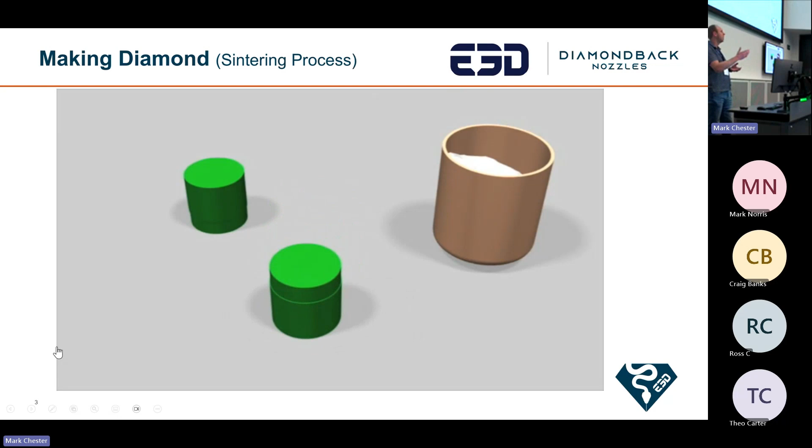So we take that powder, put it into a refractory metal can, a little container, put some tungsten carbide. We needed some sort of metal in there to act as a catalyst. We oftentimes use tungsten carbide with cobalt, so cemented tungsten carbide. Put it into this assembly that you just see here on the screen. That outer cube acts as a gasket.

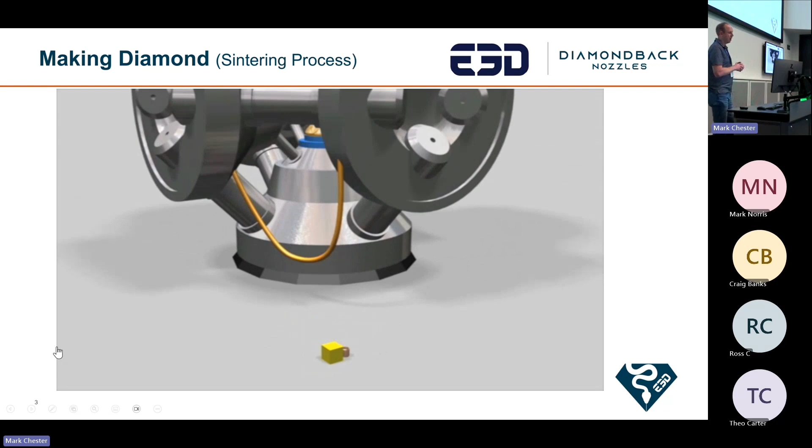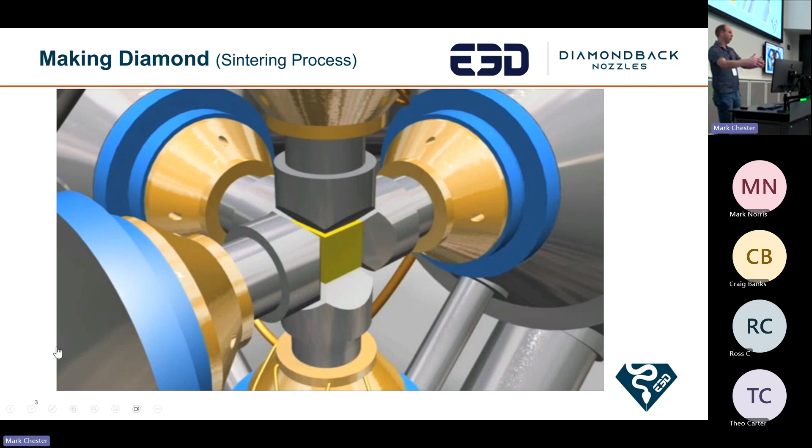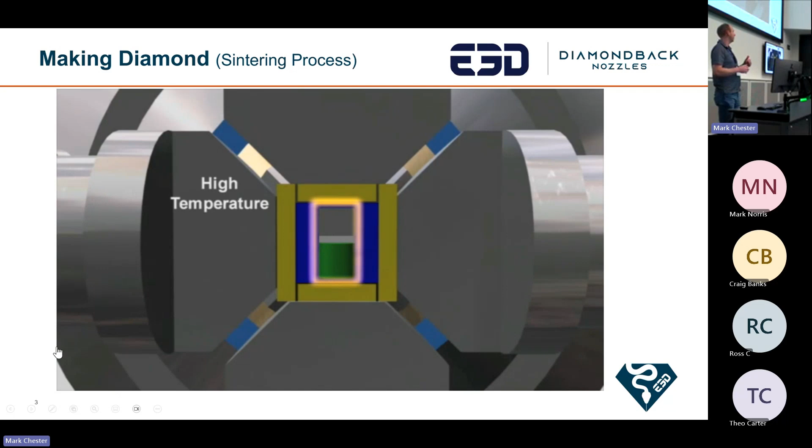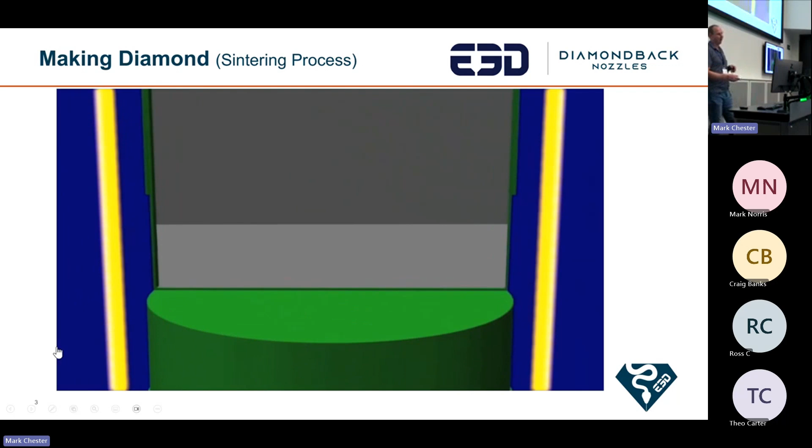So you've got internal pressures inside this press, about 9 meters tall, so you have atmospheric pressure and internal pressures that are over 1,000,000 psi. And so that gasketing material has to contain that energy, right? So not only are we adding pressure, we add high temperature to this, a graphite heater reaching over 1,400 degrees Celsius. So with those two conditions, and with the presence of that cobalt metal, that metal will liquefy, sweep into the diamond here, and that will be part of the animation in just a moment, which gets us into a condition where the diamonds actually grow together.

So you get diamond to diamond bonding. There's a little bit of confusion - some people think we take this diamond powder and put it in a matrix or a glue, if you will. But rather, the diamonds are growing together as one solid structure. So it's really where it stands out, where it gains its extreme material properties, abrasion resistance, and the thermal properties that we often have. As I mentioned during that animation, we reach over 1,000,000 psi conditions inside that press and over 1,400 degrees Celsius.

When we come out of that press, or during that cycle of that press, those conditions - it's like, what does 1,000,000 psi mean, right? For me, that's hard to even understand, what the number really means. So to bring it into reality, we like to compare it to taking the Eiffel Tower and putting it on a surface area smaller than your build plate on your printer. The pressure that build plate would experience, and that still doesn't even bring it into reality, but maybe a little step closer to help us understand what the extreme conditions are inside this process.

It's probably a little more background on the company behind Diamondback. So Diamondback is the brand, and the company backing it is US Synthetic. It's a company based out of the US in the state of Utah, in the western states of the United States. We have about 850 employees on site, a lot of engineers, a lot of patents being produced around diamond. We pride ourselves in being one of the leaders in diamond solutions in many industries, and additive manufacturing, 3D printing being one of those.

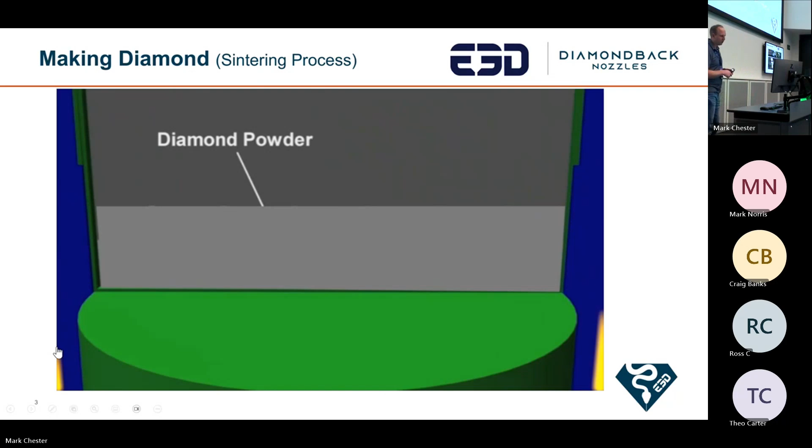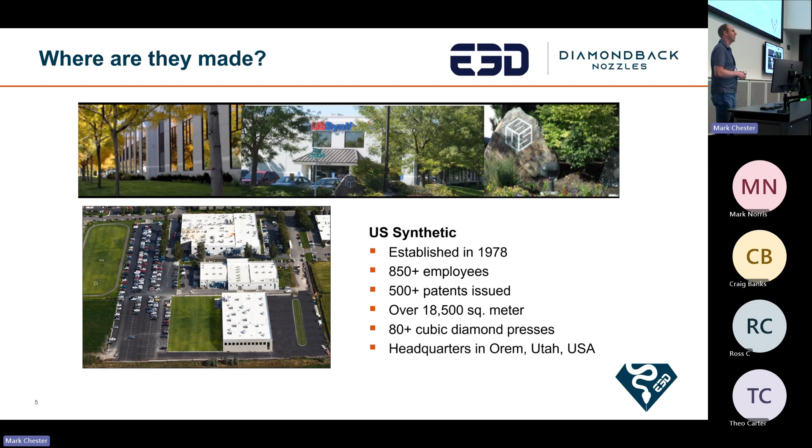We have about 80, over 80 of these presses on site on this campus that you can see on the screen, producing this diamond, three shifts a day, 5 days a week. So a lot of diamonds being produced there.

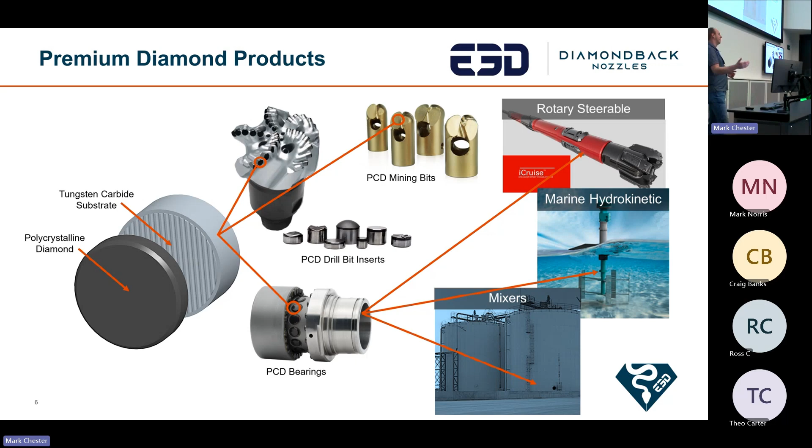I'll go into some of the material properties of PCD and why you would want to put diamond in a bearing. Those bearings are used for really harsh applications, wastewater treatment plants, places where you don't want to have to go in and do any servicing, hydrokinetic applications underwater where it's generating power for small villages and you really don't want any downtime. So high reliability, long life. And this same diamond going into these products is the same diamond we're putting into the nozzles.

I wanted to highlight our team back at US Synthetic that are making Diamondback nozzles. We're really proud of our products, but I think we're even more proud of our people and the culture that we have at US Synthetic. I wanted to highlight some team members here, Todd and Alex, key members on the manufacturing floor making these nozzles for us.

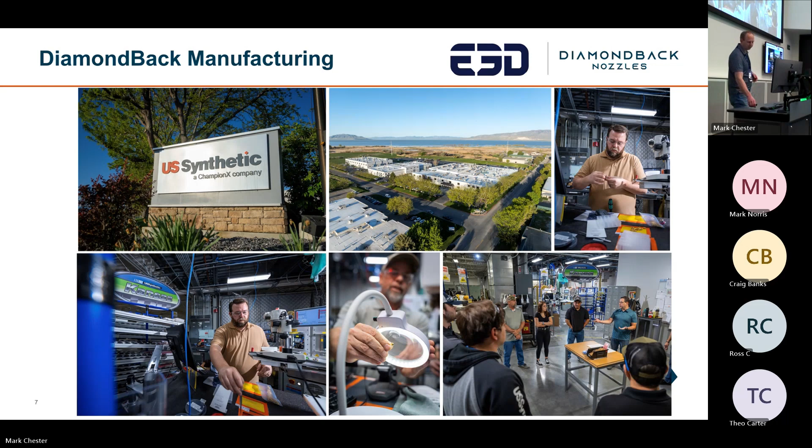So now we know how they're made. Why would I consider a diamond nozzle? Why would I want a Diamondback? What are the benefits it's going to provide me? Got another animation here to help us go over some of those features that we put into the Diamondback.

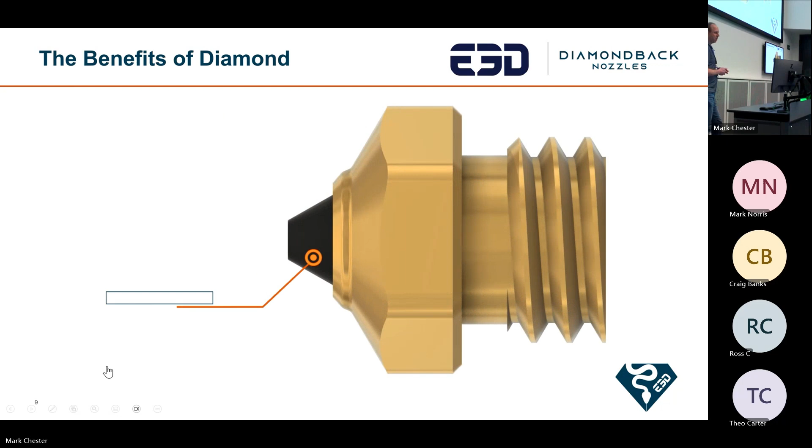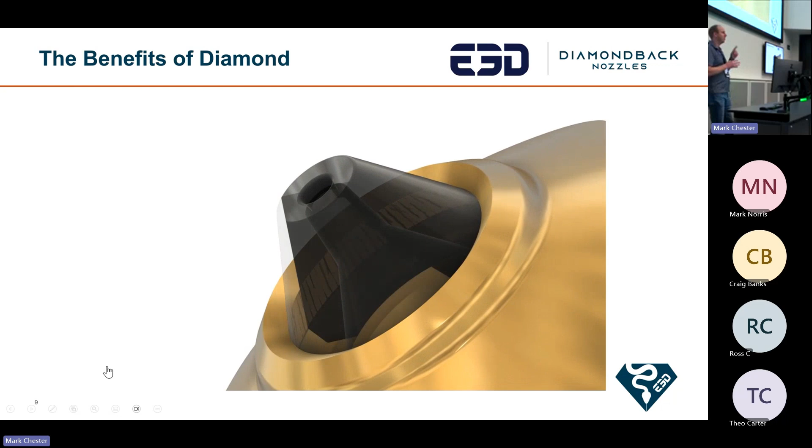So first, it's a solid piece of diamond. It's not a coating, it's not a matrix, but rather these are diamond bonds. If you wear one of these nozzles out, I need you to give me a call, so I need to know what you did to it. That's kind of where we're at with this.

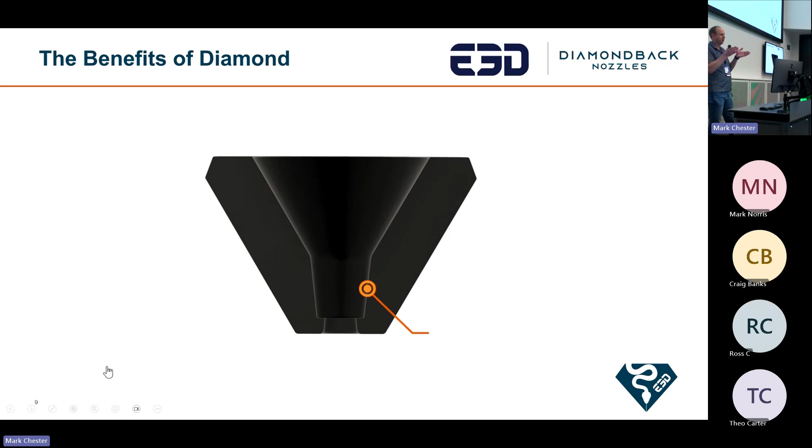Internal to the diamond, we have a dual taper kind of geometry. It's kind of to help reduce clogging and keep that extrusion force down. That, paired with the material property of diamond, means you can print some of the softer TPUs that would otherwise bind up in the driver gears. So you've got the extremes of the soft TPUs to the carbon fiber filled, Kevlar filled, whatever abrasive materials you want to print, the metal fills. It's really just a great material for this specific application.

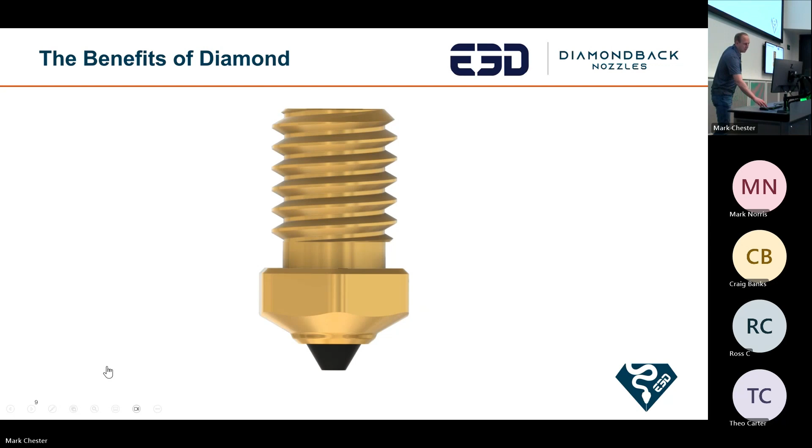Building upon that, we touched on hardness already, but for those of you who stop by our booth, you can come experience the thermal conductivity. A lot of people think diamond is more of an insulator, maybe in the ceramic realm, but it's actually the extreme opposite. It's one of the best thermal conductors out there, better than copper, better than silver, at conducting energy. So in one of these FDM type applications, that tip of the nozzle is going to maintain a constant temperature, where other materials may have more tendency to vary and change over time as fans are blowing on it, as accelerations are happening, things like that.

I mentioned we produce bearings. The coefficient of friction of diamond is extremely low. These bearings actually have no lubricant, no grease, no oils, because of how low that coefficient of friction is. They're often placed in applications where there's water or some other cooling mechanism. There will be heat generated, but there's no contained or sealed lubricant in those bearings, and that's due to the coefficient of friction.

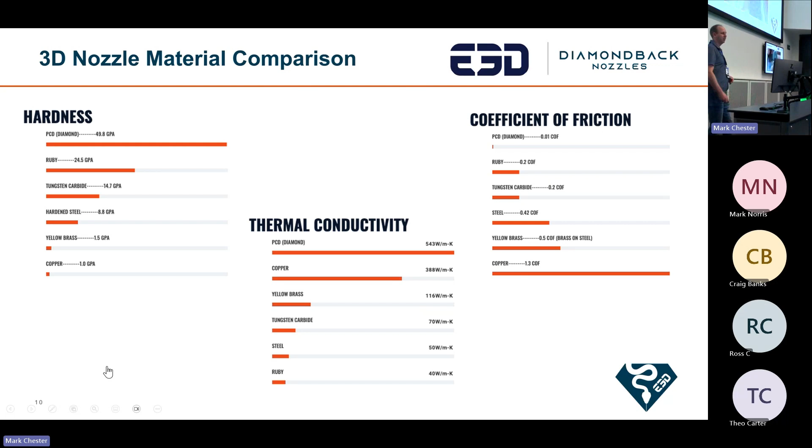Translating that over to the nozzle front, again it goes to being able to extrude and produce with those softer TPUs, because of that lower extruding force that's required. So in many aspects, these extreme material properties are really ideal for the application of 3D printing.

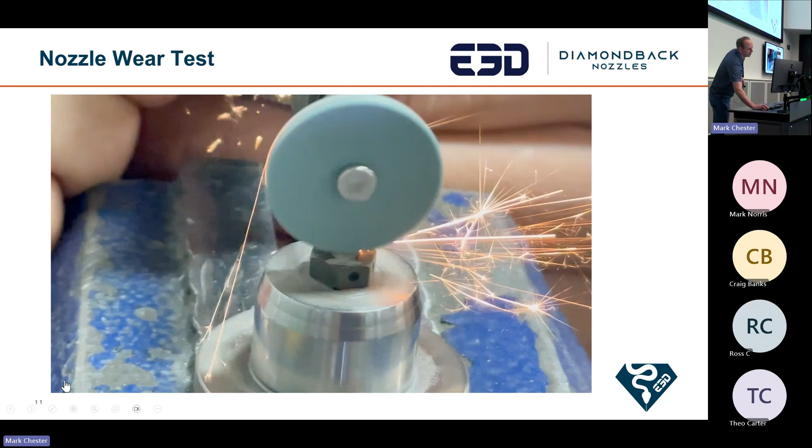I want to share, here's a video. We went down on a Friday and said, hey, let's go play around a little bit with some different nozzles that we have and run some tests. So there we have the accelerated wear test, and full disclosure, all videos are shown at 2x speed.

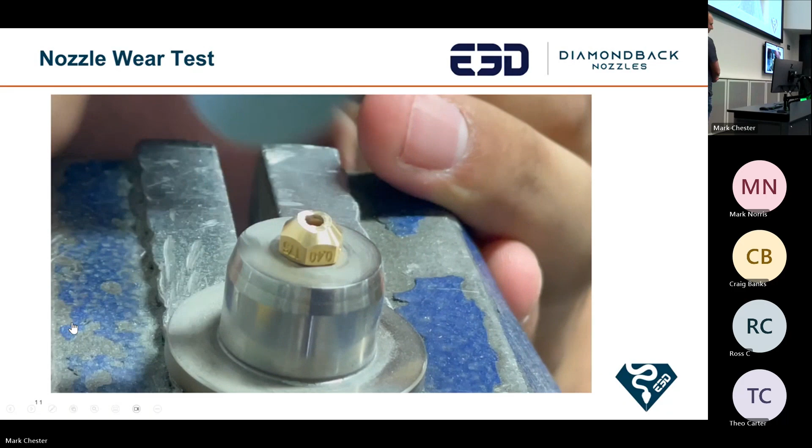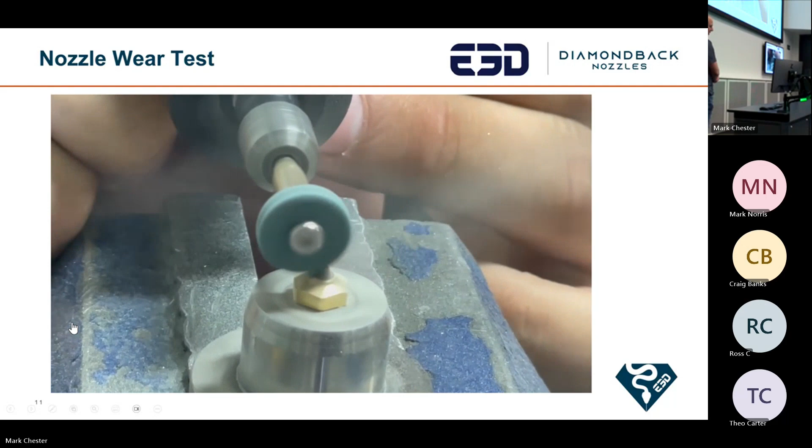So if you look there at the tip, you can go throw that on your printer and start printing. But I need to dust it off first. That might be a good idea. A little extreme, right? I mean, get a little pushback. Well, that's not how you use the nozzle, but it's just driving the point that if you're concerned about abrasion, that's one less thing you can worry about. Just worry about printing and producing the parts you want to make. So we had fun with that.

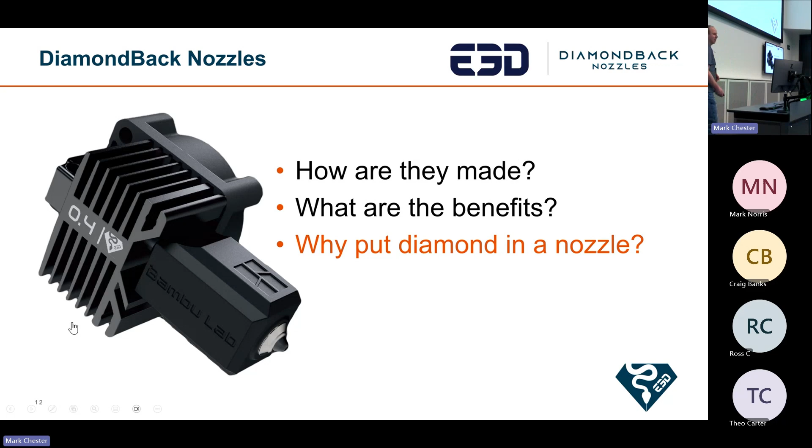So now, what are the benefits? Talk about material properties. With Diamondback, you can unlock the potential of your printer. You can print the metals, the ceramics, not have to worry about the wear of the nozzle, wasting that filament. Swing by the booth - we've got some examples of 316 stainless steel printed on an FDM printer that you can check out. Those are kind of fun to see. But then we have print any filament, so it's not just these extreme metals, but if you want to print PLA, you can swap and change. You just put the one nozzle in and use your printer. Don't worry about changing out the hardware.

Particularly with the Bambu nozzle and the collaboration we've had with E3D, I wanted to highlight that it is a drop-in replacement. We've worked with Bambu in testing and through E3D and their expertise in extrusion systems, really tested this system, made sure it's a great product, ready to launch and make available. These same properties I've been discussing about Diamondback nozzles apply not only to the Bambu product line, but to all nozzles we're making, whether it be the Revo, standard V6, or the new Bambu that was just launched.

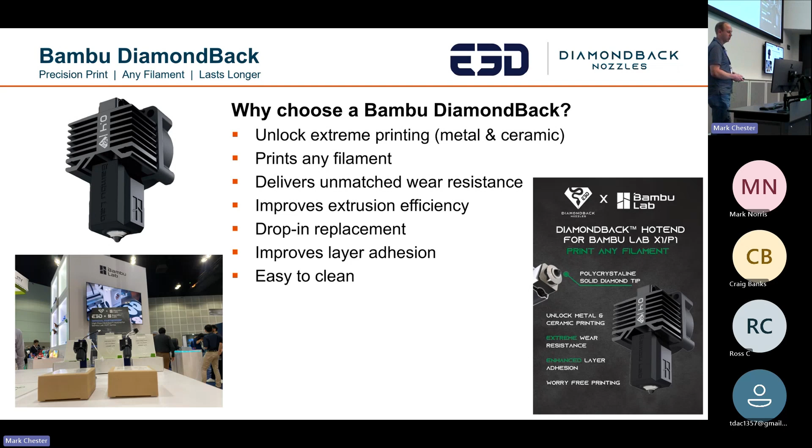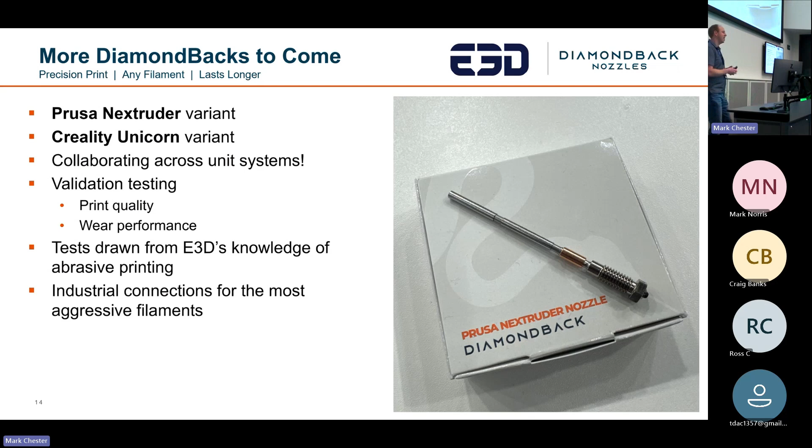We really appreciated E3D and the knowledge base they've brought. We brought some connections with extreme filament manufacturers like BASF, that's producing the metal embedded filaments. If you get a chance to come sit by our booth and check out those parts, I think it might open up your ideas of what type of parts you can actually get and produce out of that simple FDM printer you've got at home. So we're really excited that we continue working with E3D, continue these collaborations, and continue to expand and bring Diamond and its capabilities that not many people are aware of into the industry of additive manufacturing.